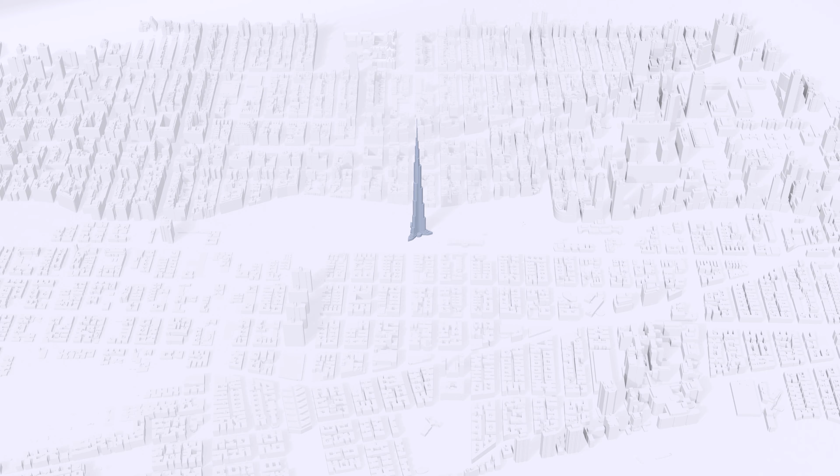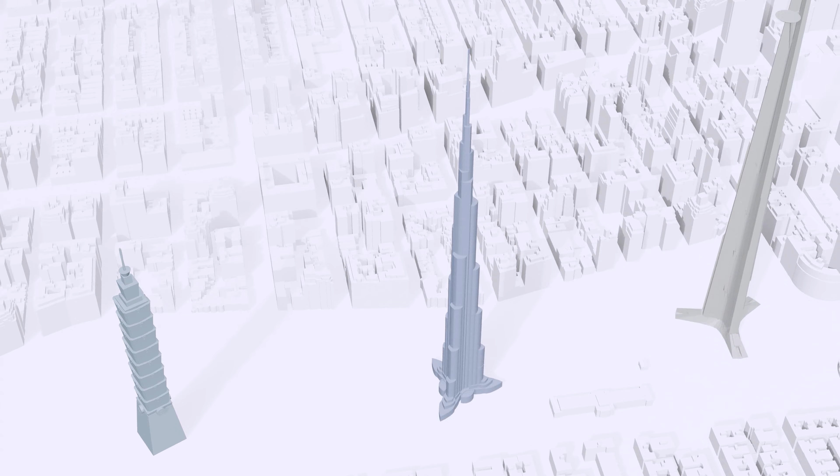This is Burj Khalifa, the current tallest skyscraper in the world, rising to a height of 828 meters, beating the previous holder, Taipei 101, in 2010 by a large margin. Yet the next in line to become the tallest building in the world is the Jeddah Tower, currently under construction and designed to a height of at least 1,000 meters.

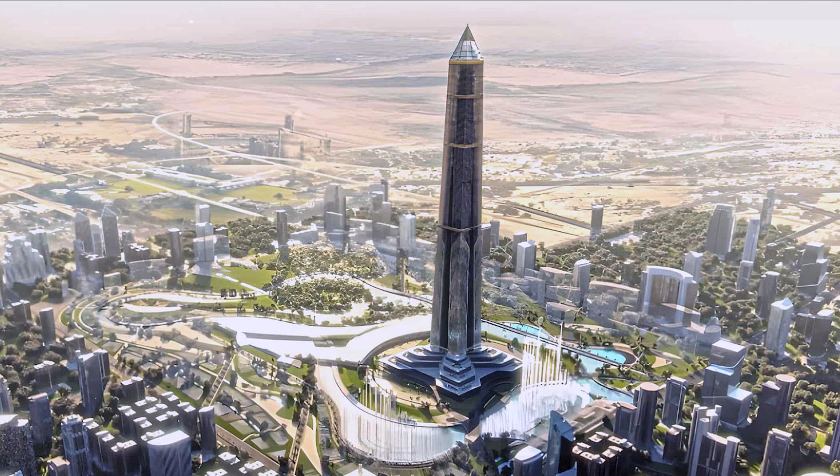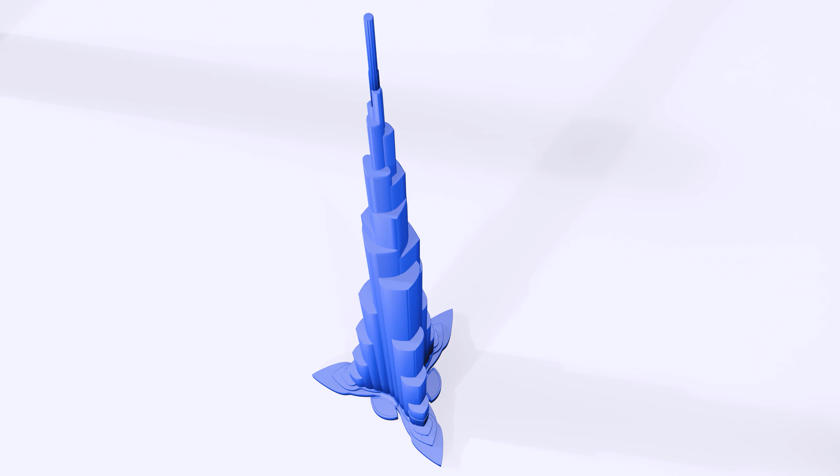While this seems impressive, there have been many proposals for mega tall skyscrapers, rising to 1 mile and some even higher. So how feasible are these mega tall skyscrapers? Engineering, construction and maintenance of mega tall skyscrapers is so complicated that they are often overlooked when discussing this topic. The fact is, higher doesn't always mean better, and in this video we'll explore the engineering and economics behind some famous mega tall skyscrapers to find out how high we can build. Let's dive in.

It is no surprise that the need for cities with tall buildings boiled down to overpopulation and efficiency. As the world population will drastically increase in the future, cities have been growing to keep up with this demand to provide both living and work opportunities. This migration of the rural population to cities is a major cause of this increase. Once people get used to urban living, they rarely go back to the countryside.

Only 30% of the world's population was urban in 1950. Today, 55% of the world's population resides in urban areas, and it is estimated that the urban population will further increase to about 70% by 2050, according to the United Nations Department of Economic and Social Affairs. To prevent urban sprawl and the destruction of valuable agricultural lands and improve transport, cities have been growing vertically rather than laterally.

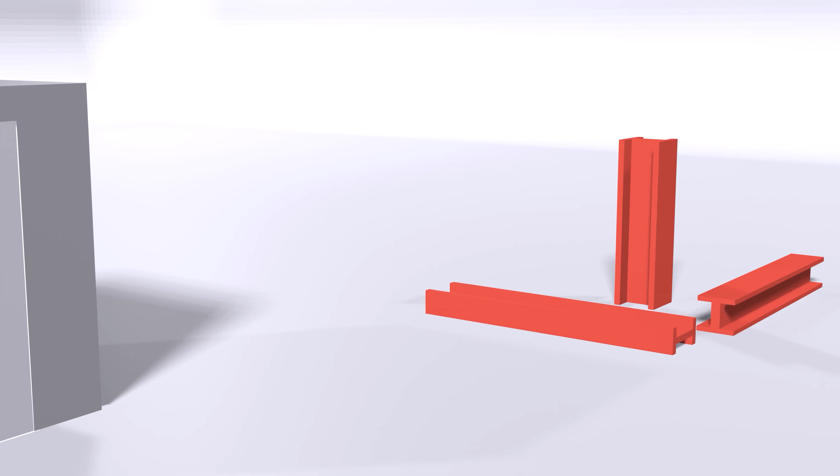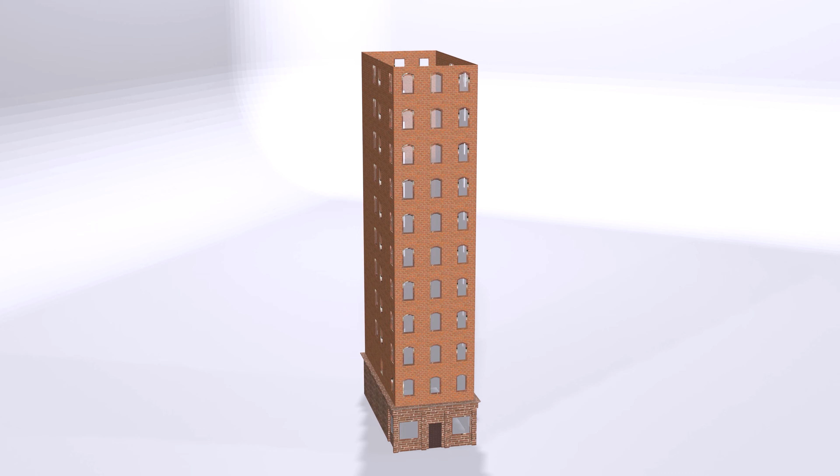The humble beginnings of the first multi-story building were only made practical through the use of elevators and steel. In 1857, the Haughwout Department Store in New York witnessed the installation of the world's first passenger elevator, invented by the American industrialist Elisha Otis, which could travel 5 floors in less than a minute. Yet the earliest skyscrapers rested on extremely thick masonry walls at the ground level, which limited how high we could build before the building collapsed under its own weight. Architects and engineers soon turned to a cast iron and wrought iron framework to support the weight of the building's upper floors, allowing for more floor space.

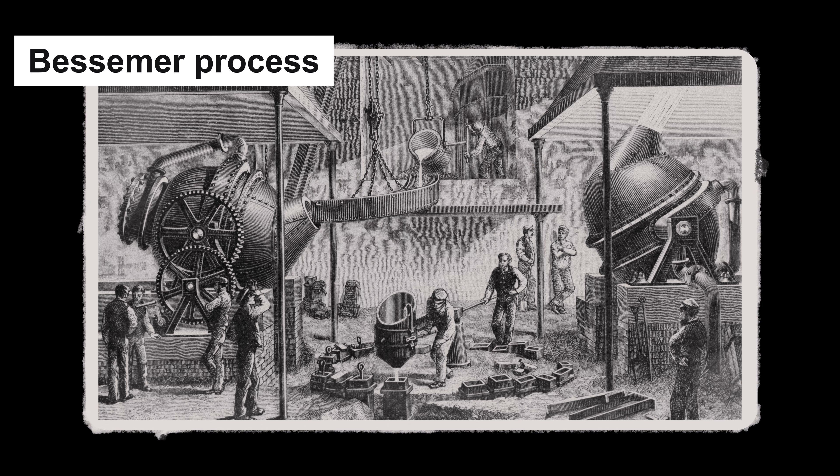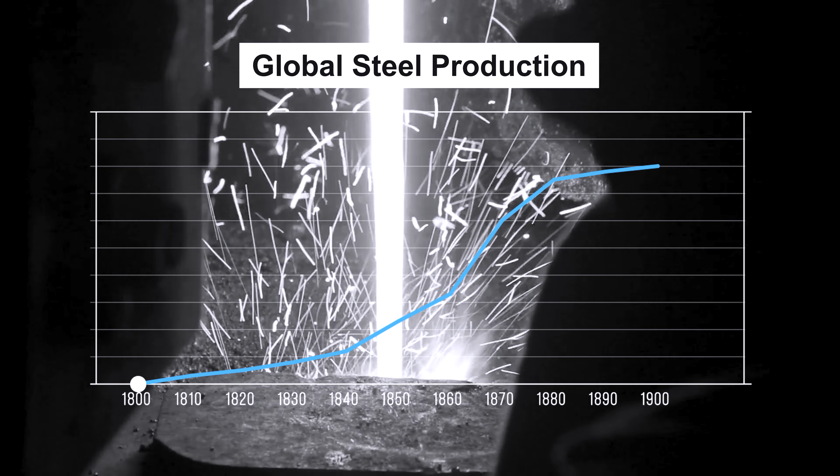It was, however, the refinement of the Bessemer process in 1860 that allowed for a major advance in skyscraper construction. This inexpensive industrial process allowed for the mass production of steel from iron. As steel is stronger and lighter in weight than iron, the use of a steel frame was possible in the construction of truly tall buildings.

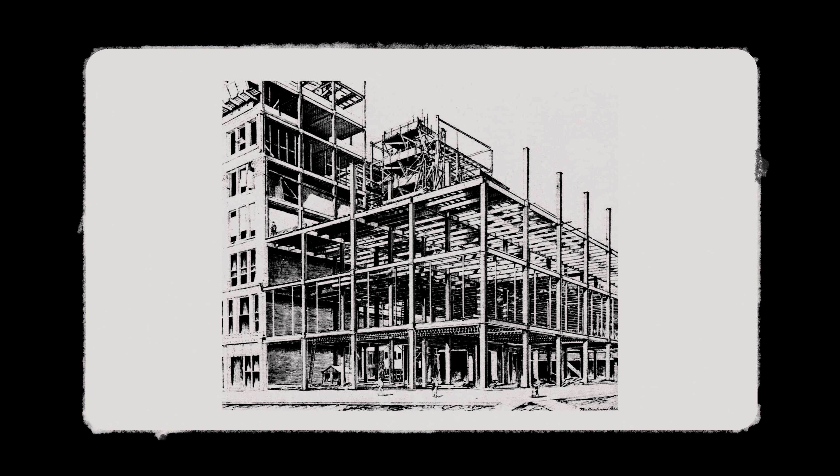The Home Insurance Building, built in 1885 in Chicago, is what most consider the world's first skyscraper. Not only were passenger elevators used, but also an early version of a steel skeletal structure was used for the first time to bear the weight of the building's exterior walls. This innovation was credited to William LeBaron Jenney, who is also widely recognized as the father of the American skyscraper. His work made the modern skyscraper possible. The metal frame design was relatively fire resistant compared to the mostly wooden central city of Chicago.

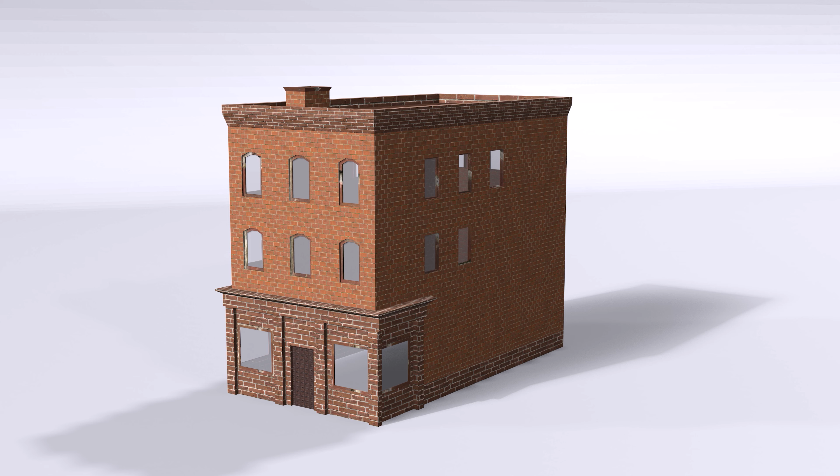The Home Insurance Building didn't have to get thicker, darker and heavier to get taller, unlike its predecessors that were supported by nothing but their own masonry walls. Its steel frame structure weighed only a third as much and proved that high-rise buildings could be a solution for density problems, and with those two essential technologies, a new building type was developed rapidly. And with that, the skyscraper height race began.

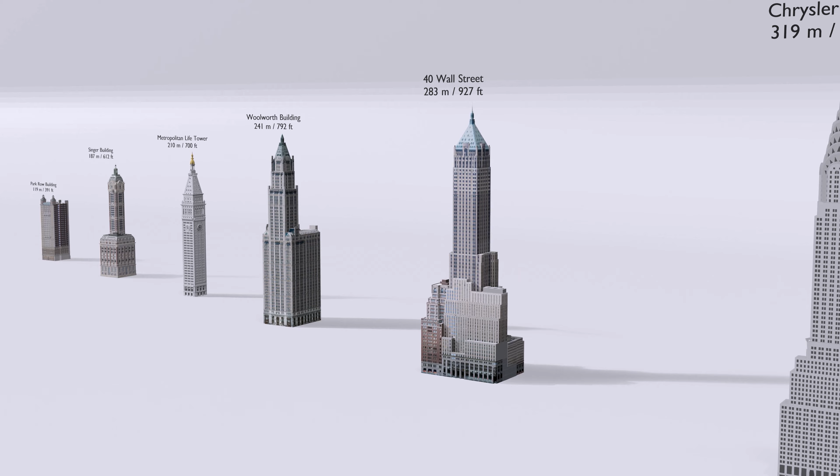Let's do this quickly. Starting from the Park Row Building in New York that reached 30 stories in 1899, using the same steel frame system. Soon after, many skyscrapers were constructed in New York in the following years, getting higher and higher. The threshold height of 300 meters was first reached by the Chrysler Building in 1930. This was overtaken by the 381-meter Empire State Building.

Although this was a record-breaking building, there were virtually no open spaces on all floors of the building. Just have a look at the building's 61st floor. Steel columns and beams formed a stable 3D grid throughout the entire structure. However, such closely spaced columns obstruct open spaces in the building.

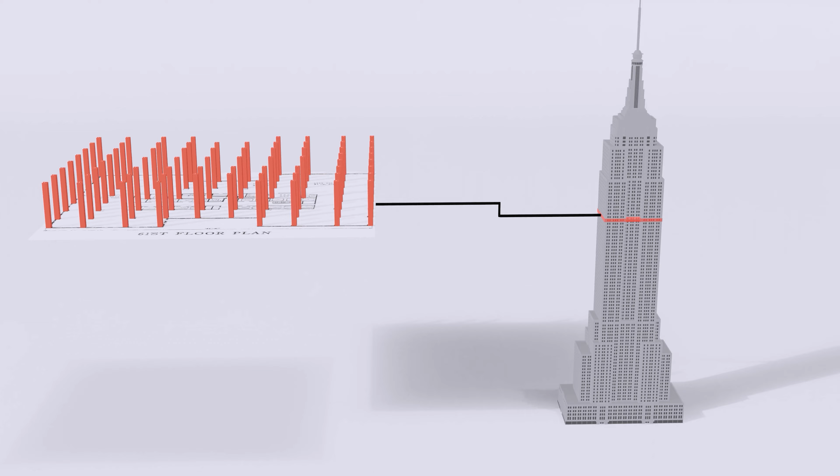The World Trade Center followed the same steel frame structure as the Empire State Building in 1973. The Sears Tower, or the Willis Tower, moves away from the structural frame of its predecessors to a revolutionary bundled tube structural system, which is a cluster of 9 tubes connected together to act as a single unit. The tubes support one another and strengthen the entire structure.

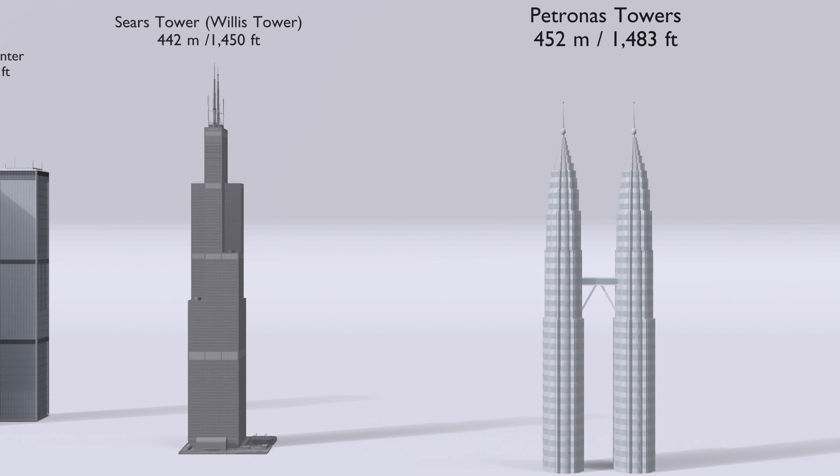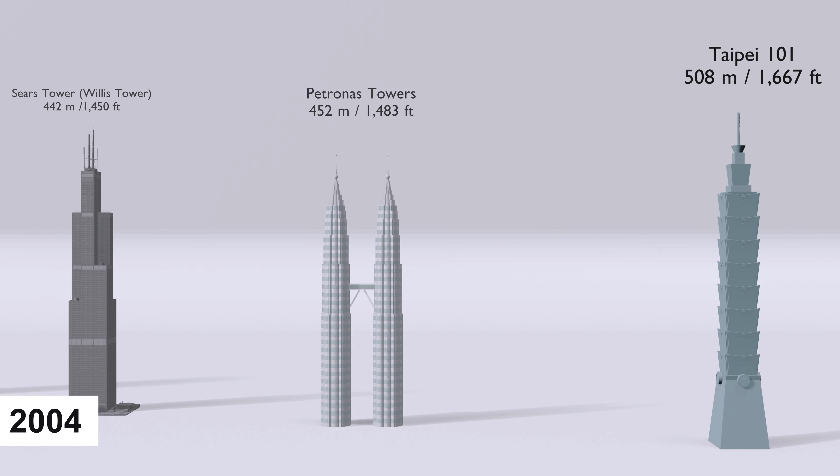Toward the end of the 20th century, the region with the most tall buildings shifted from the US to Asian countries. The title for the tallest in the world was taken by the Petronas Towers in 1998 in Kuala Lumpur. The 452-meter towers exceeded the architectural height of the Willis Tower, which still held the title for the tallest occupied floor building by then. In 2004, the 508-meter Taipei 101 in Taiwan finally eclipsed both architectural and occupied heights of the Willis Tower and used a new structural system known as the core outrigger.

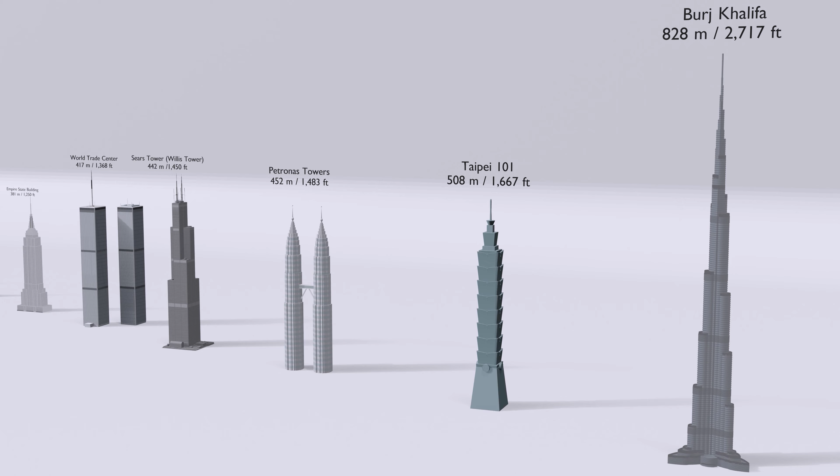On some levels, the inner core is connected with the perimeter columns for more stiffness. And if this starts to become confusing, don't worry, we'll get into this later in this video. In the 21st century, the Middle East also jumped in the skyscraper race with the 828-meter tall Burj Khalifa, which took the title for the tallest building in the world in 2010.

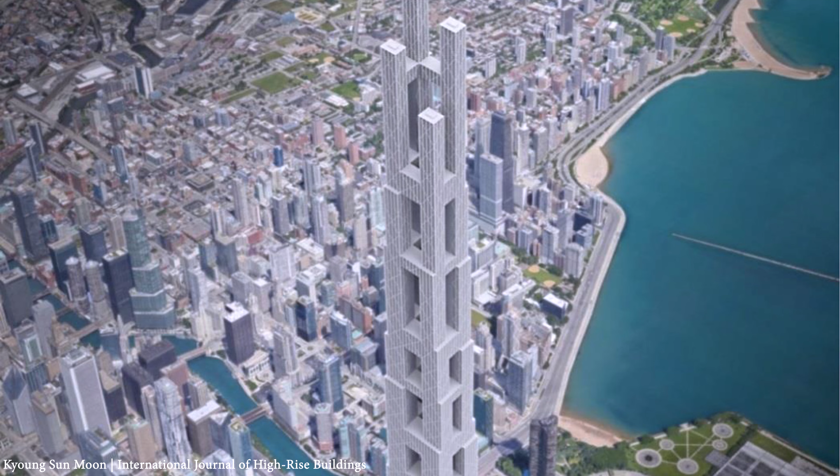However, Burj Khalifa will soon lose its title to the Jeddah Tower, which has been under construction for quite a while now, but that's a discussion for another video. The building is expected to reach a height of over 1 kilometer in Saudi Arabia and will finally surpass the Burj Khalifa. There have also been many proposals for mega tall skyscrapers, with some expected to exceed 1 mile, including this building, which we will get into later in this video, and some reaching even more ridiculous heights like the X-Seed 4000. Although this structure was never meant to be constructed, it's a testament of human ambition.

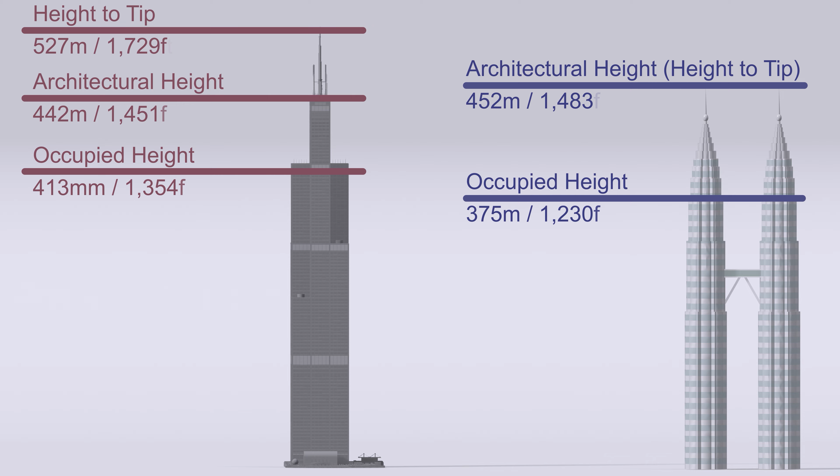When it comes to building mega tall skyscrapers, the question is not whether these proposals are possible or not. In many cases, it's not an engineering issue. The issue is, why would anyone want to build these structures in the first place? One of the most fundamental architectural challenges is to provide occupiable spaces for people, which many current tall skyscrapers fail miserably in delivering. When the Petronas Towers were completed, it was architecturally taller than the Willis Tower by 10 meters, but the Willis Tower's occupied height was 38 meters higher than the Petronas Towers.

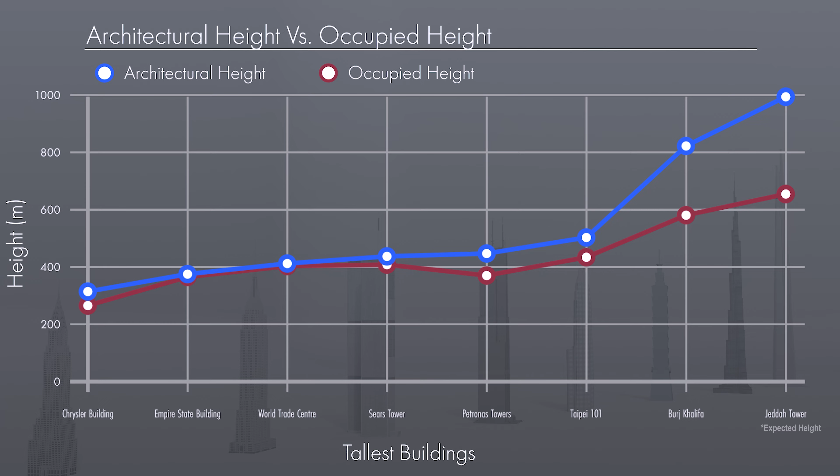The height of the Petronas Towers was accomplished by constructing the spires as an integral part of the main structure. The architectural height does not include functional and technical equipment that can be removed, so things such as antennas and signage are not considered part of the architectural height, which is why the Petronas Towers were architecturally higher. Architectural and occupied height differences become even larger as buildings become taller, as owners wish to extend the height of their buildings with so-called vanity heights by constructing spires.

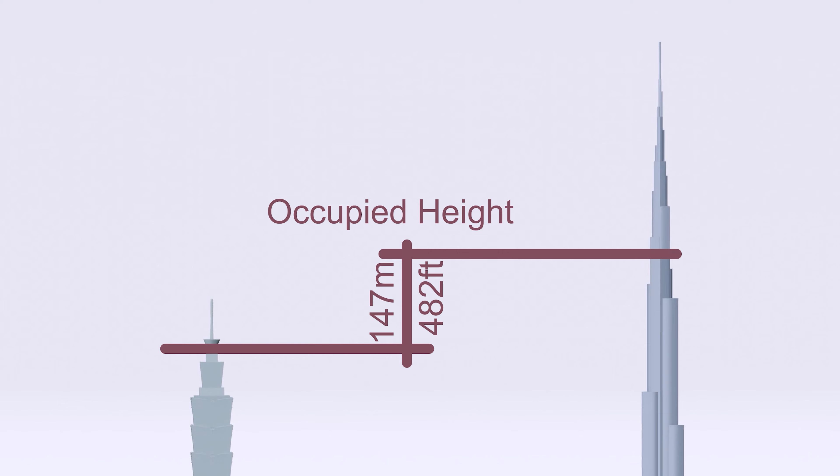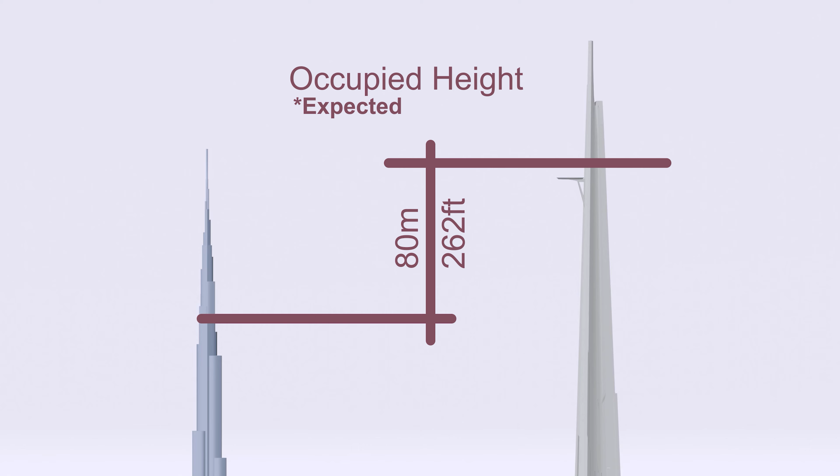The current tallest, Burj Khalifa, with its height of 828 meters, exceeds Taipei 101 by a significant margin of 320 meters. However, the occupied height difference between Burj Khalifa and Taipei 101 is only 147 meters. It is also expected that the occupied height difference is only 80 meters between Burj Khalifa and the Jeddah Tower. Much of this massive skyscraper will be completely deserted. The Burj Khalifa has more than 200 floors, but only 160 of them are accessible to the public. The building's top floors are so thin that no one can live in them.

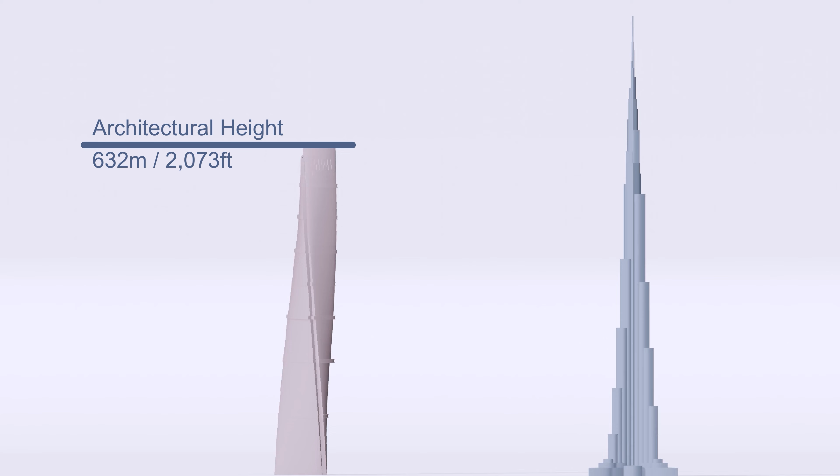An excellent example of maximizing occupiable spaces is the Shanghai Tower, which opened in 2015, and it's a 128-story building with an architectural height of 632 meters. While it is still significantly less than the Burj Khalifa, its occupied height is only 2 meters different. Unfortunately, in this era of architectural design, many recent supertall heights are often more monumental than practical compared to those of the 1970s. Tall buildings are used to show off the country's prestige. Yet for a tall building to be considered a skyscraper, at least 50% of its height must be occupiable, according to the Council on Tall Buildings and Urban Habitat. Therefore, you can't just build a tower that reaches 2 kilometers into the sky and call it the tallest building.

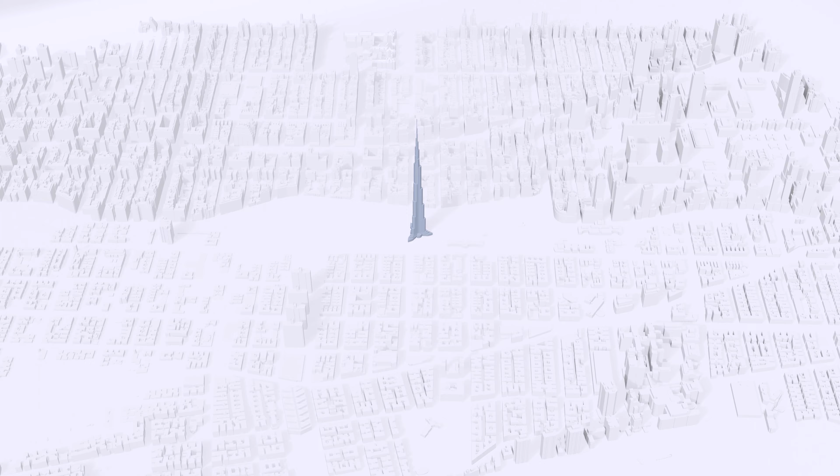Telecommunication and observation towers do not meet the 50% threshold and are not considered skyscrapers. But is there a way we can build more functional tall buildings that reach 1 mile in height and have more usable space than current structures?

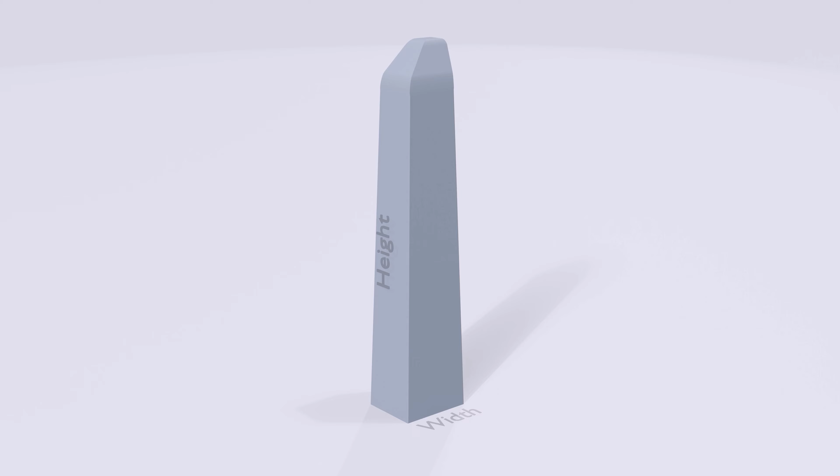The greatest engineering challenge in tall buildings is to contain the forces of gravity and wind. Tall buildings will likely collapse under their own weight unless they taper off to the top. As the building gets taller, the slenderness height-to-width ratio increases, and the tower becomes dramatically more sensitive to wind. As a result, it cannot be comfortably inhabited.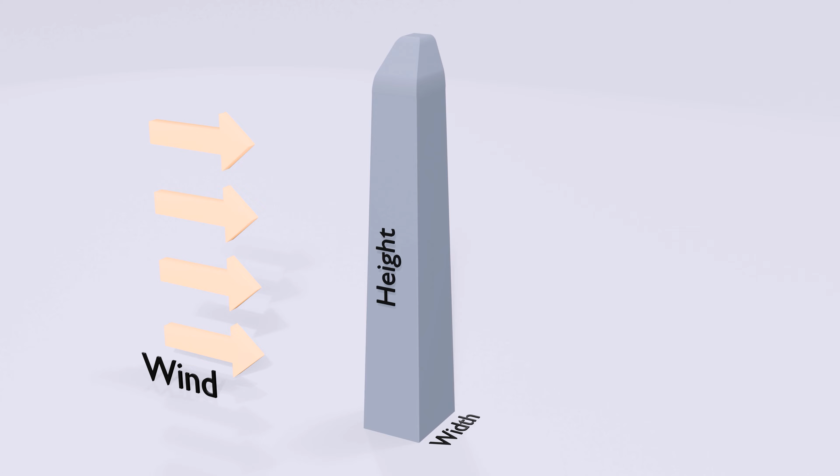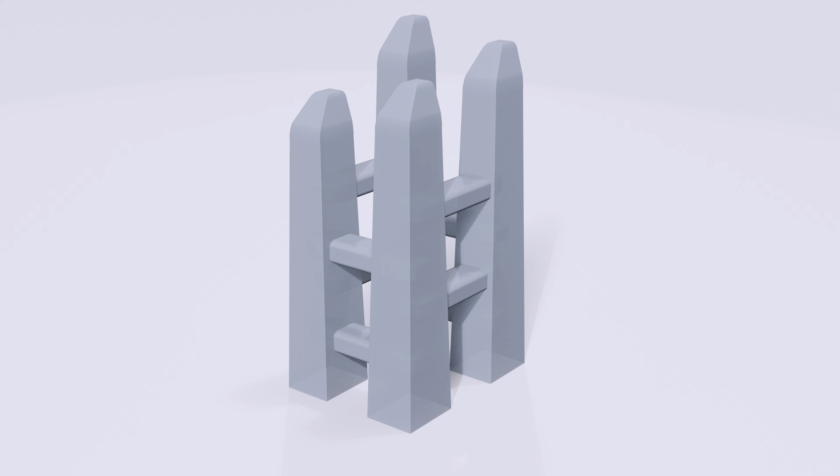It is also worth mentioning that humans are surprisingly sensitive to vibration, to the extent that building motions may feel uncomfortable, even if they are small. To overcome the slenderness effect, we can make the building wider at the base, or connect several towers with bridges at different levels, so they will reinforce and stiffen each other. However, it is not always possible when dealing with dense cities with small blocks of land.

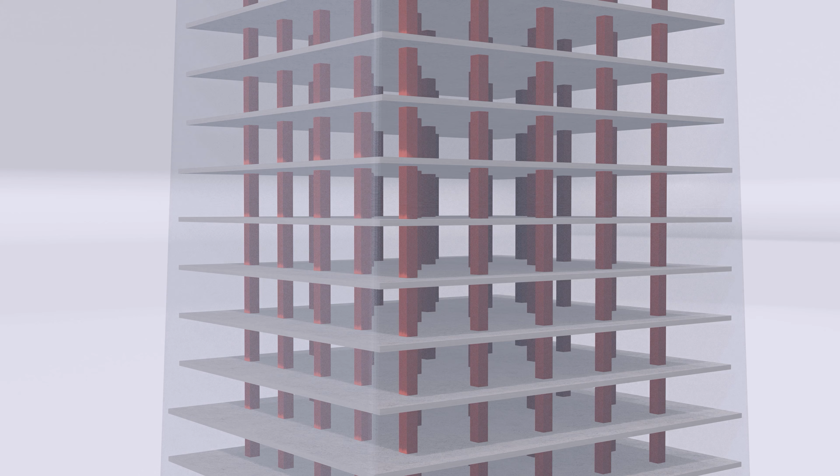Structurally, a skyscraper consists of a substructure or a foundation of different types depending on the ground and soil condition, and a superstructure of columns and girders above the ground. We can simplify this by imagining this tall building as a vertical cantilever out of the ground. As we all know, a steel beam consists of two flanges and a web that is capable of supporting its own weight. It is also able to support lateral forces from the wind.

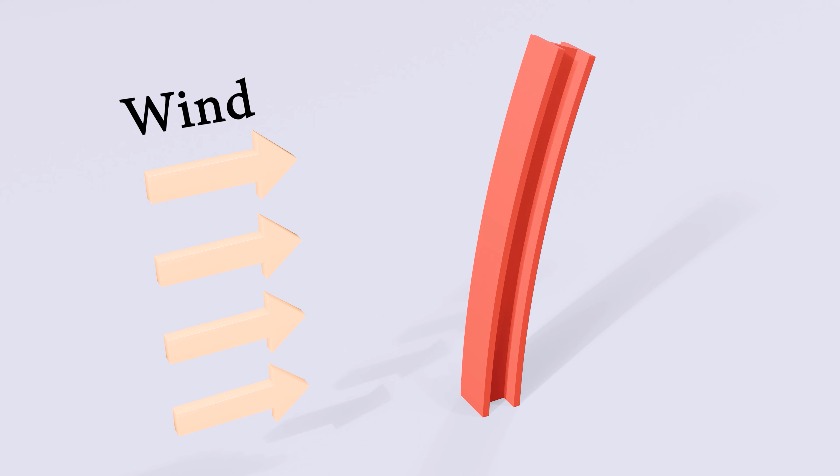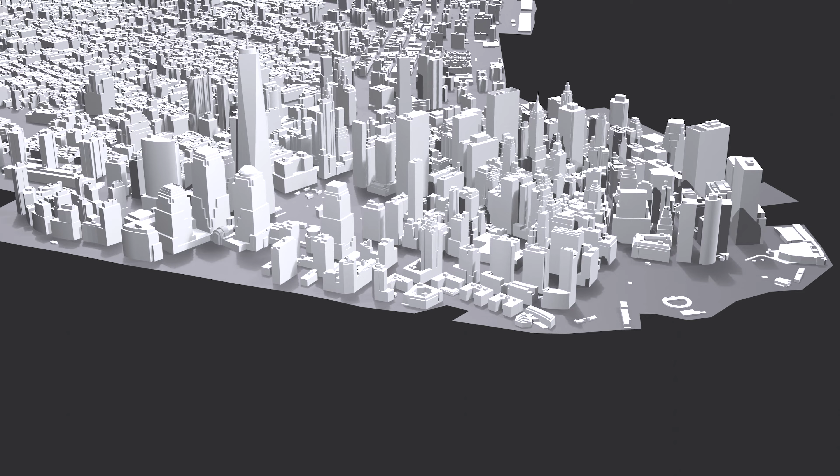Let's see what happens. As the wind blows directly on it, the cantilever can deflect, and the flanges facing the wind experience tension, while the far flanges experience compression. Yet altogether, a system with its foundation and superstructure can contain both vertical and lateral loads. Just like a cantilever, buildings have structural systems to support their own weight and any lateral movement caused by wind and earthquakes, which govern the design of high-rise buildings.

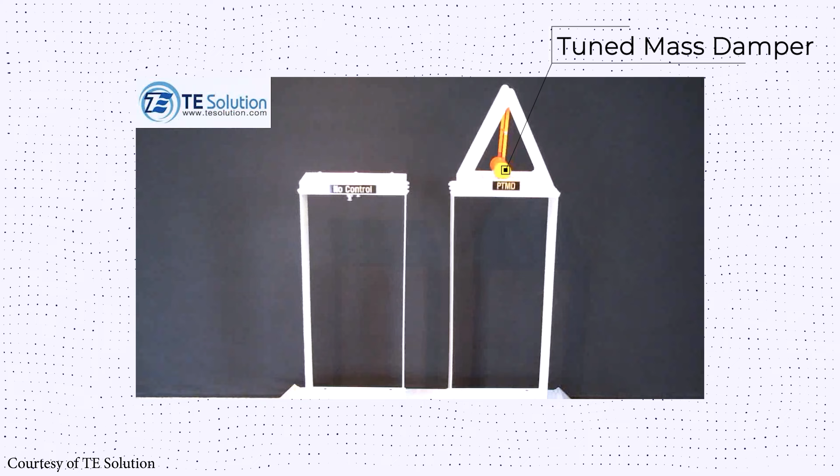Up to 10 stories, the wind loads rarely affect the design. However, for tall buildings, wind and gusting effects become especially problematic. Transverse loading, called vortex shedding, becomes in sync with the building. This effect of wind can be minimized by installing tuned mass damper systems, which reduce the effect of wind forces. We can also aerodynamically shape the building. For example, the Shanghai World Financial Center has an opening that reduces the stresses of wind pressures on the tower. Rounding the building can also reduce the wind stresses on the building.

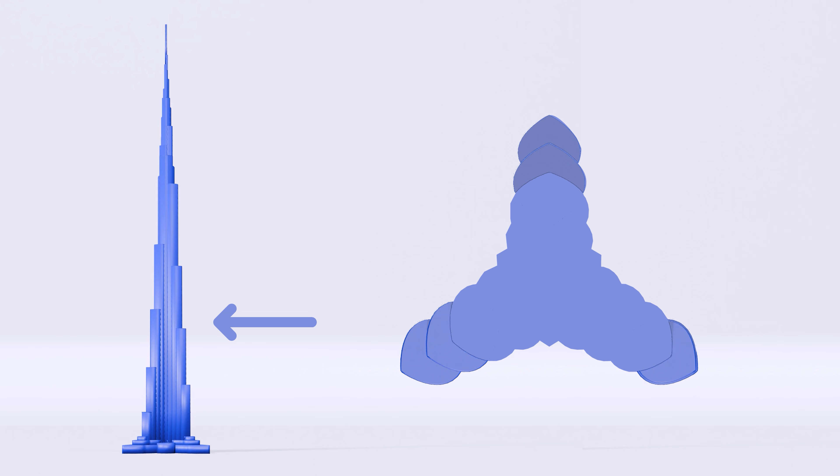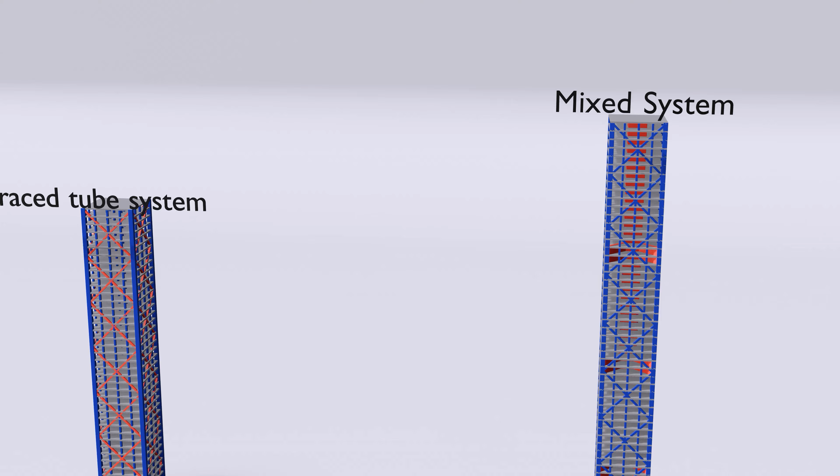The Burj Khalifa's asymmetrical design isn't just for aesthetics, it's a strategic feature to combat vortex shedding. Wind vortices can never coalesce because the wind encounters a different building shape at each tier. This confuses the wind and eliminates potentially dangerous resonance. Therefore, the higher the building, the higher the vertical and lateral loads, and to combat those loads, the building needs more than just a clever external design. It needs an internal structural system that can support itself and withstand lateral loads.

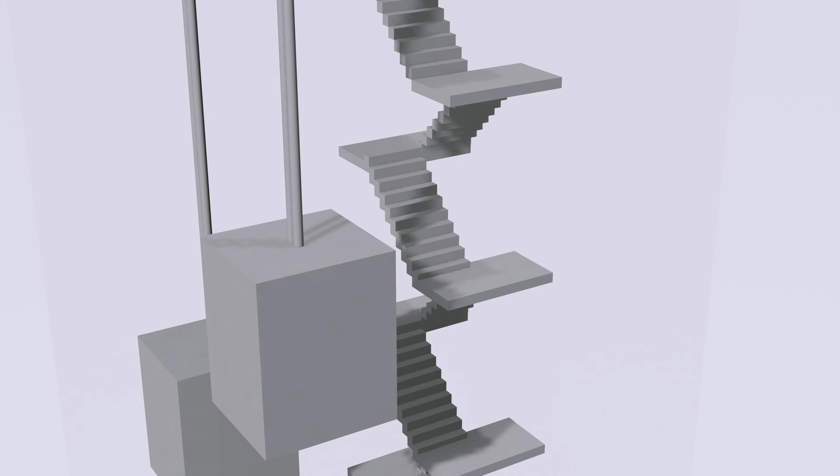There are many structural systems for skyscrapers that are constantly improving with every new building. The tube-in-tube systems are probably the most common for buildings between 40 to 100 stories. The building consists of an inner tube that houses the building services such as elevator shafts and stairs and carries some of the building's vertical loads. The outer tube or the perimeter tube not only carries some of the building's weight, but also resists the building's lateral forces. The tube-in-tube system can be further improved by connecting the inner core with the outer core.

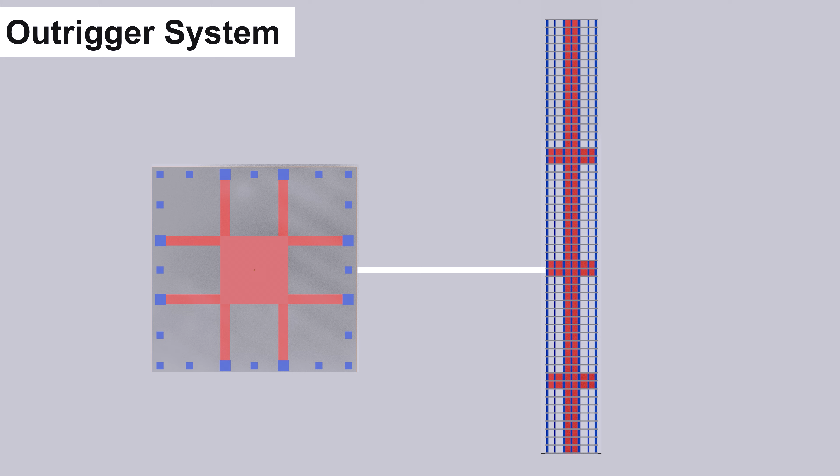This gives the building the required stiffness to counteract the lateral loads of the building by transferring those loads to the core of the building through the outriggers. When the building is loaded laterally, the columns facing the wind experience tension, while the far columns experience compression, which makes them more efficient than structural cores without outriggers. At present, the tallest building structured with a core outrigger system is the 632 meter tall Shanghai Tower.

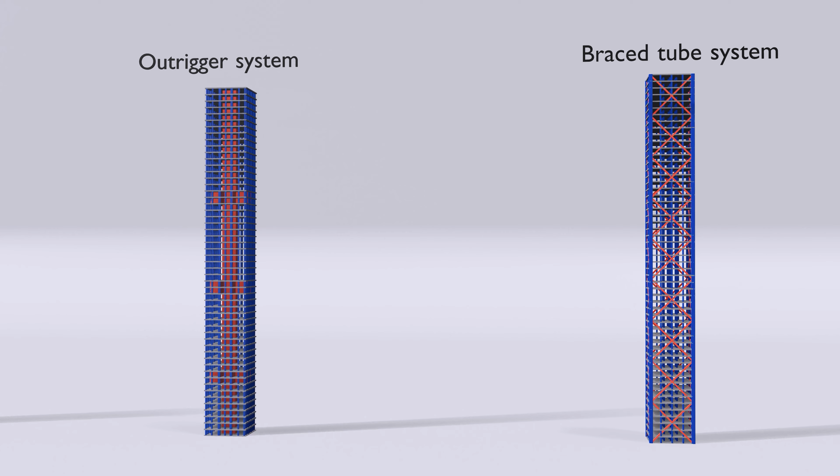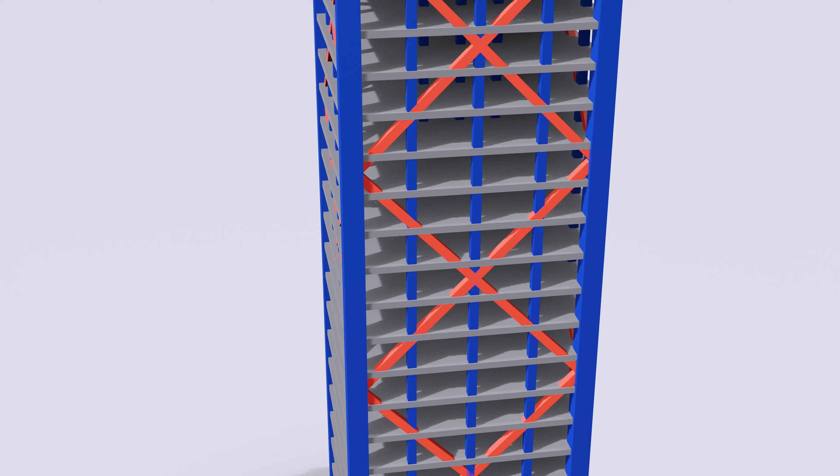However, the efficiency of the core outrigger system cannot exceed some of the most efficient megatube structures, such as the braced megatubes, which use widely spaced exterior columns braced by diagonal members, which transfer gravity loads and lateral loads to the mega columns. An example would be the John Hancock Center. In this 100-story skyscraper in Chicago, you can clearly see the diagonal members which support the megatubes.

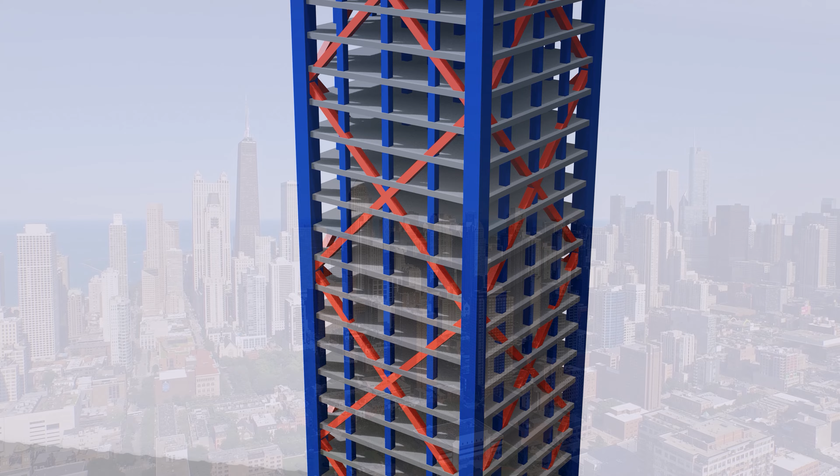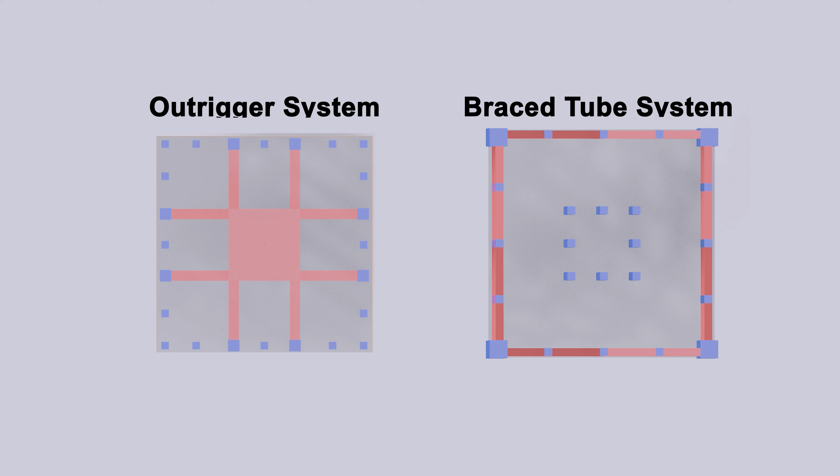This design uses far less steel than the outrigger truss system. Yet the core truss system is used more frequently in tall buildings because it's architecturally more flexible in terms of facade design. All the required lateral stiffness of the braced tubes is allocated at the perimeter tubes, while the core structure is designed to carry only gravity loads.

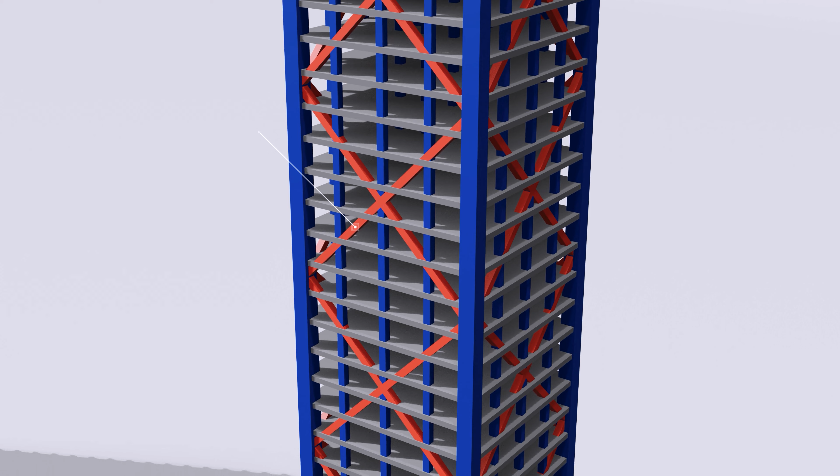This means that the perimeter columns, especially the corner columns, are quite big, which restricts viewing. These are usually prime real estate locations reserved for luxury apartments and office space. The diagonal trusses also restrict viewing, which is why the core truss is the preferable design.

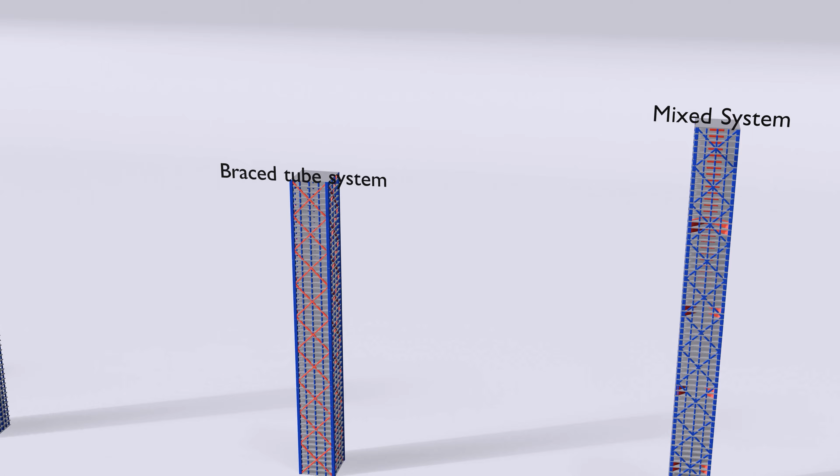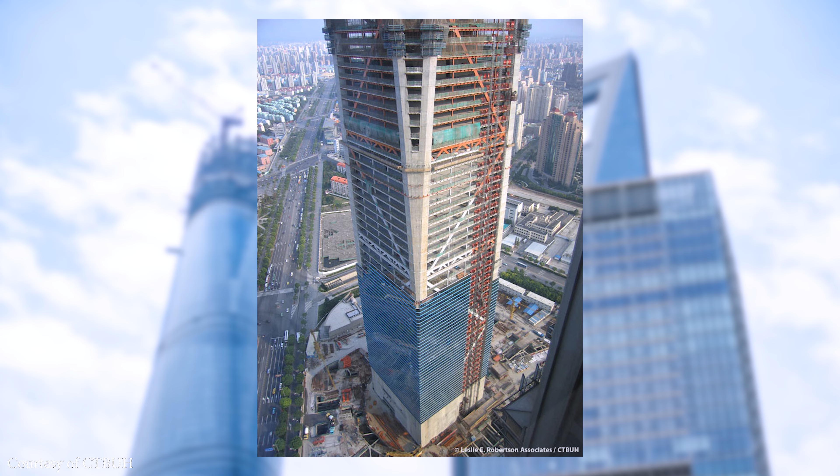Yet sometimes the core truss can be combined with the mega tube system, which results in a mixed system that can reach up to 700 meters. A good example is the Shanghai World Financial Center. During its construction, before all the glass and the building finishes were installed, you can clearly see the mega columns of the building connected to the building outrigger and the diagonal trusses.

While this looks impressive, the tallest building in the world took a different approach for a very good reason. As discussed earlier in this video, for buildings to get taller, they need to get wider. So if we scale a square building to get 1 kilometer high, the interior spaces become uncomfortable for users, especially due to the lack of natural daylight.

Burj Khalifa and the Jeddah Tower move away from the square building design to a buttressed core system. This design not only provides good viewing, but is also structurally much more favorable because it's able to confuse wind with its unsymmetrical design. Burj Khalifa has 3 wings that get smaller as the building gets higher.

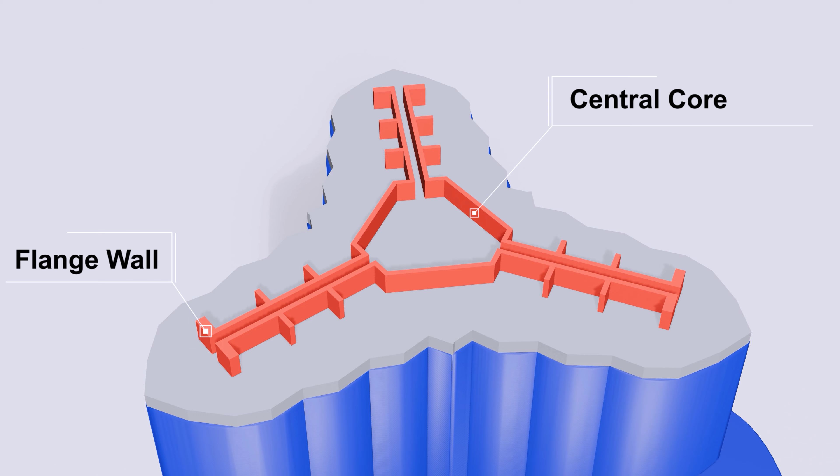The central core itself is further extended as shear walls into the architectural spaces of the 3 wings and terminated with a thickened wall. These thickened end walls are quite similar to the flanges of a vertical cantilever. The difference is it has a Y-shaped cross section where the extended shear walls act as webs. The wings are also stiffened by additional shear walls called fin walls, which also act architecturally as interior walls.

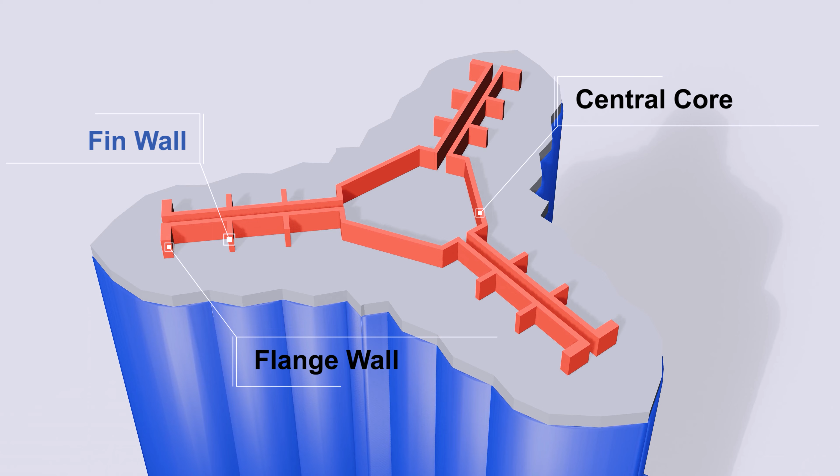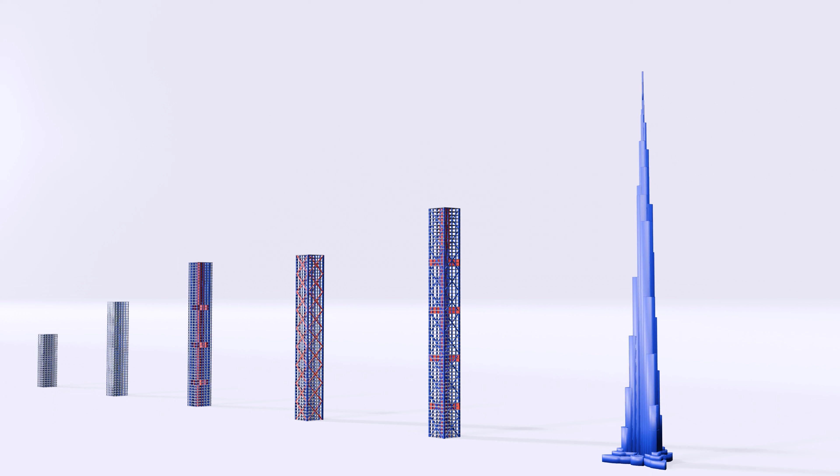The buttressed core system gives Burj Khalifa the stiffness required to counteract any lateral loads, and the building is able to carry its vertical loads by tapering to the top, which means less usable space as the building gets higher, and this provides an architectural limitation. But is it possible to build higher without sacrificing much usable space?

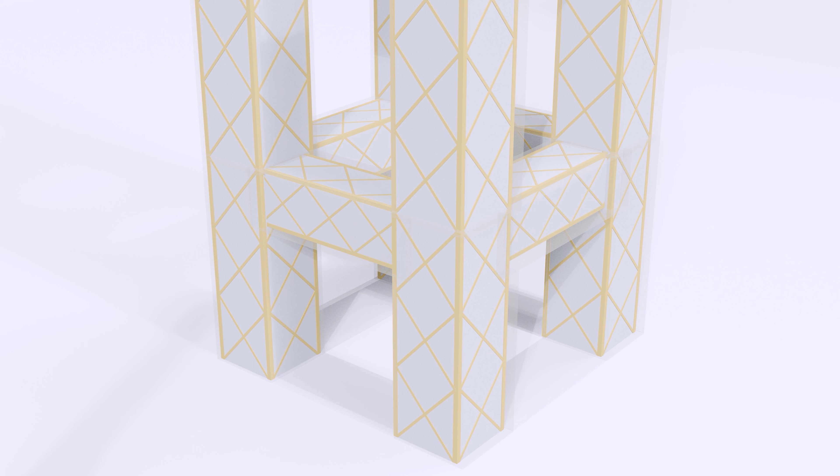The answer is yes. Perhaps one of the most radical proposals for mile-high skyscrapers is the superframe conjoined tower design. Fazlur Rahman Khan, who engineered the John Hancock Center, envisioned a conjoined tower with 4 braced megatubes interconnected by multi-story trusses. The height of these towers can be increased very efficiently by structurally connecting them.

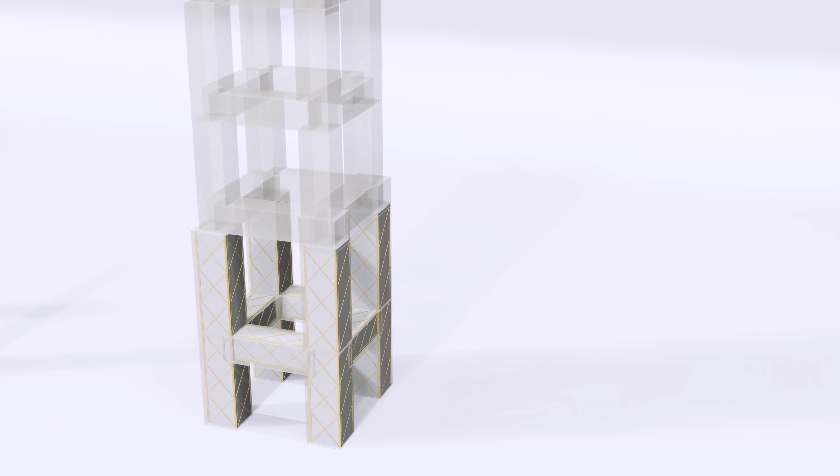The horizontal braced tubes are what create the superframe, which is basically combining these towers into one building, and uses the width of the entire complex as structural depth instead of the width of the individual towers, resulting in a stiff structure with a huge lateral resisting capacity.

This concept can also be applied to 3 buildings in a triangle shape with 120 degrees between them, or even conjoined towers with more than 4 buildings, which is similar to the concept of the Tokyo Sky Mile Tower, or even the X-Seed 4000, which is a group of buildings connected together.

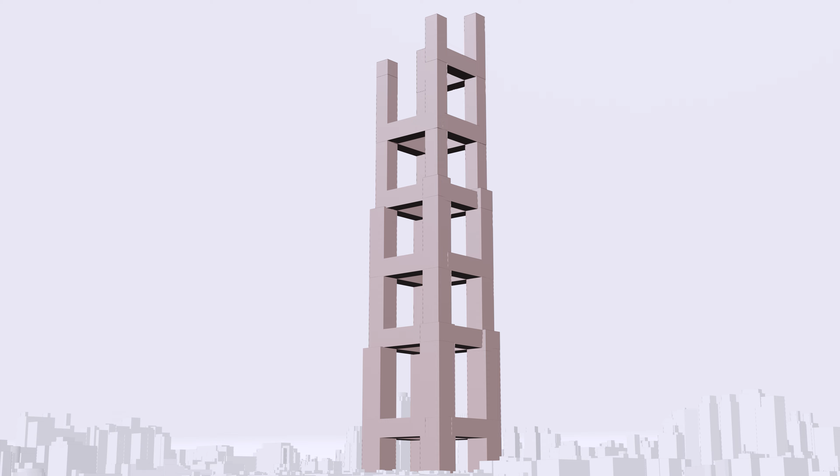Despite its characteristics for extremely tall buildings, the superframe conjoined tower design may not be easily employed for existing dense urban land because of the very large building sites required. The standard block in Manhattan is about 274 by 80 meters, which means in order to build a conjoined tower with 4 buildings, almost 4 blocks of land would need to be used.

Considering the limited land size, it would take decades to acquire the land needed to build such a structure, that is if someone has the guts to take on such a massive risk. Although structurally it might seem possible to build mile-high buildings, which is an excellent way to prevent urban sprawl, realistically, is building super tall economical?

Hong Kong shares many similarities with New York. Both are land-starved and surrounded by water. Both are international trade and commerce hubs, and both have large populations, with skyscrapers crowding those two cities. Yet the Chinese government decided to ban skyscrapers over 500 meters because of safety reasons and waste of resources.

For example, previous projects such as the Shanghai Tower were unable to generate revenue successfully. The project experienced significant cost overruns and delays. The building's total cost was reported to be 2.4 billion, much more than initially planned due to the complexities of its design and construction. The building suffered from many issues such as an oversupply of office space in the city, the rising cost, and the change of work trends that left the building largely unoccupied for many years.

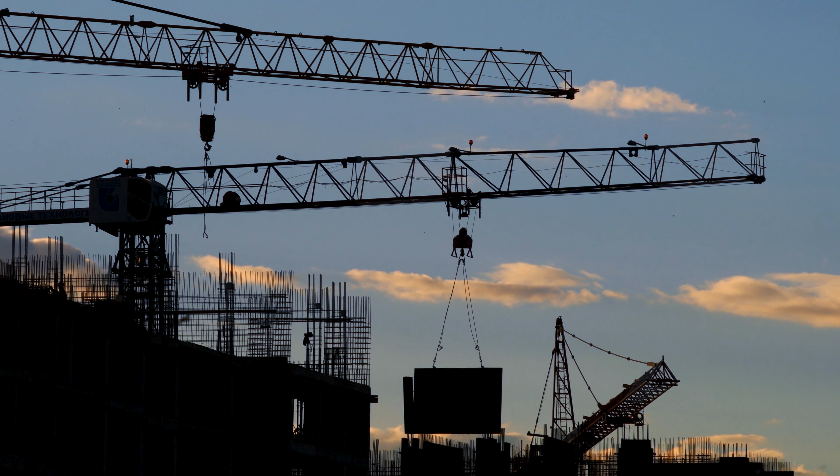Tall buildings obviously cost a staggering amount of money. Burj Khalifa cost 1.5 billion, and the Jeddah Tower reportedly would cost 1.2 billion. However, it would not be surprising if this figure doubles in the years to come, and any government or entity that pays that kind of money needs to recoup the cost somehow, making these builds financially unfeasible. But such projects end up as symbols of the city, which is why some countries justify the construction of such mega projects. In addition to the cost, there are other issues that face tall buildings.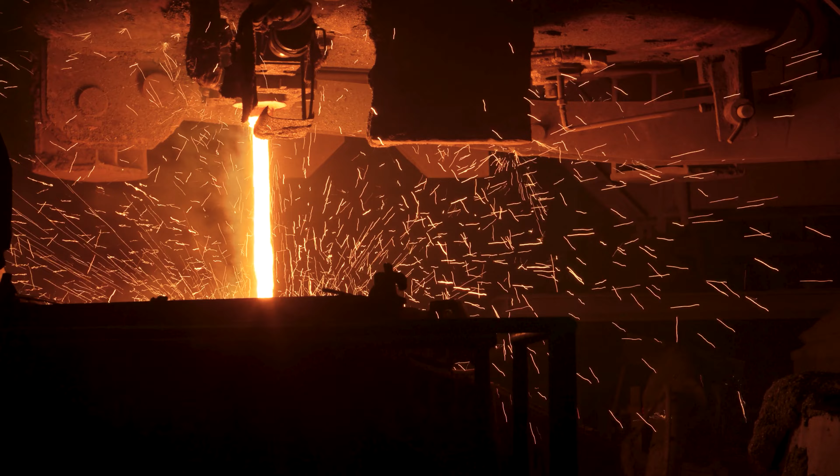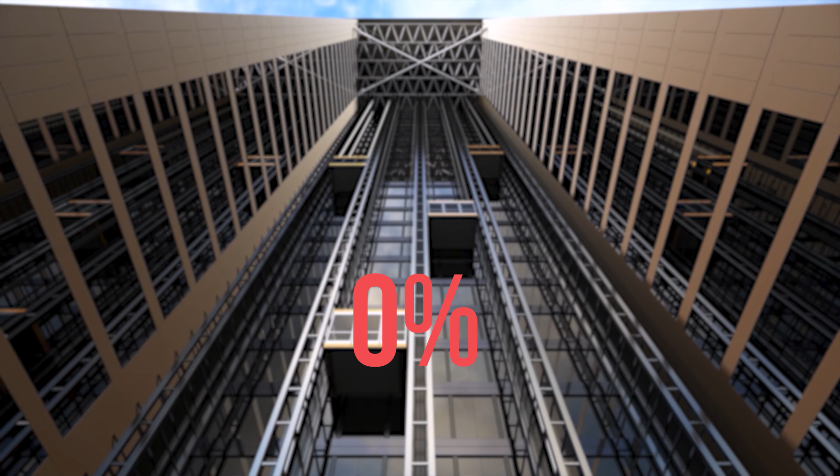The construction of skyscrapers involves intensive use of materials like steel, concrete, and glass, which have high carbon footprints due to the energy-intensive processes involved in their production. Tall buildings require a significant amount of energy for heating, cooling, lighting, and operating elevators. According to UCL's Energy Institute, tall skyscrapers account for 40% of the total energy consumption each year. The main reason is related to heating and cooling. Large windows may provide magnificent views, but they are not good insulators. Even triple glazed windows lose far more heat than a well-insulated brick wall.

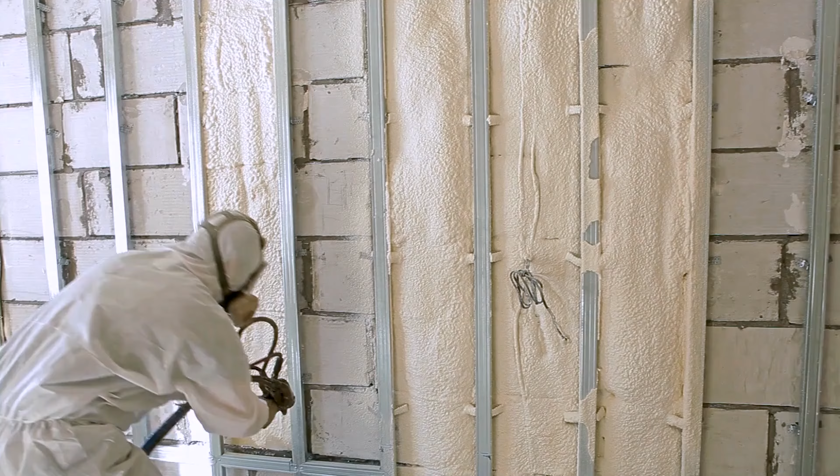Supply of water is another issue. Since water does not flow uphill, high-rise buildings depend on pumps to lift water to the upper floors. Tall buildings can have up to 3 different pump systems for chilled water, heated water, and sprinkler system, which require energy and space to function. And let's not forget waste disposal, which is another complicated system that needs to be fitted for a building to be functional. Yet the two biggest limitations of skyscrapers have always been fire and vertical transport.

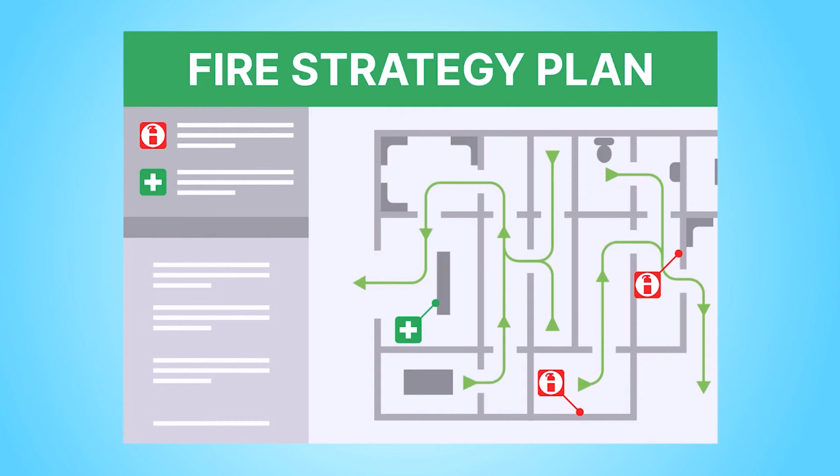It is much more difficult to design fire safety plans for skyscrapers because it takes longer to evacuate during an emergency. Due to the immense height, conventional firefighting techniques are useless. The average fire hose can spray up to 15 meters, which means for a 100-meter tall building this would not work. And in the case of the Burj Khalifa, it's over 800 meters. In such cases, skyscrapers need to be designed so that fire outbreaks can burn themselves out without external intervention and allow people to exit the building safely. This means that skyscrapers need to be constructed using fire-resistant materials so they won't collapse easily. They also need to be separated into compartments to prevent the spreading of fire and equipped with fire suppression systems such as sprinklers to put these fires out.

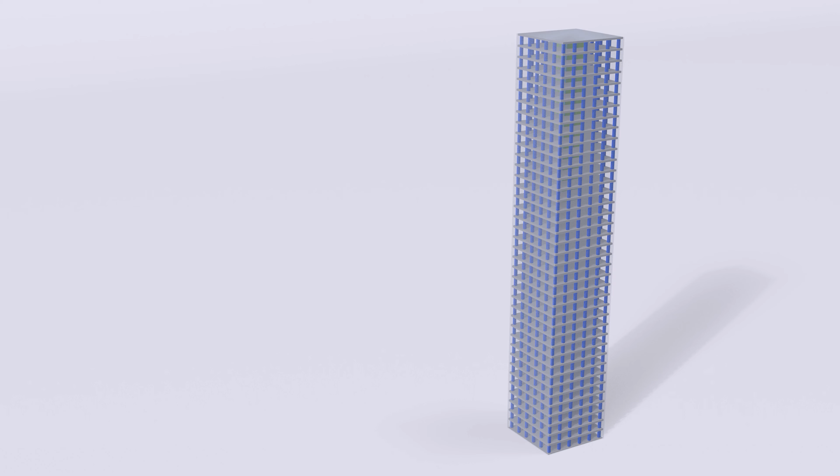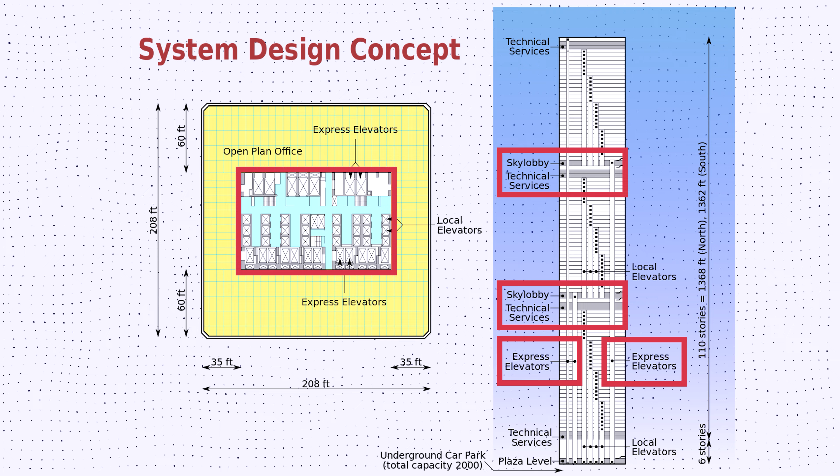On another issue, the taller the skyscraper, the more elevators it requires. A single elevator cannot get to the top of an enormous skyscraper because the weight of the elevator cables becomes too much for the winch motor to haul. Instead, mega-tall skyscrapers rely on transfer elevators and sky lobbies. The more elevators the building has, the less space there is for offices and apartments. Plus, people would have to wait longer for an elevator, which is a very difficult issue to balance when working with limited spaces. This is a huge area of skyscraper design and construction that is usually overlooked when discussing how high we can build.

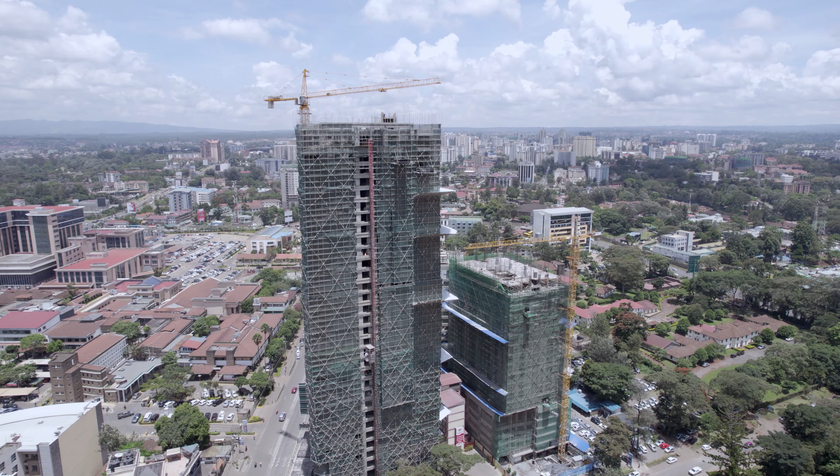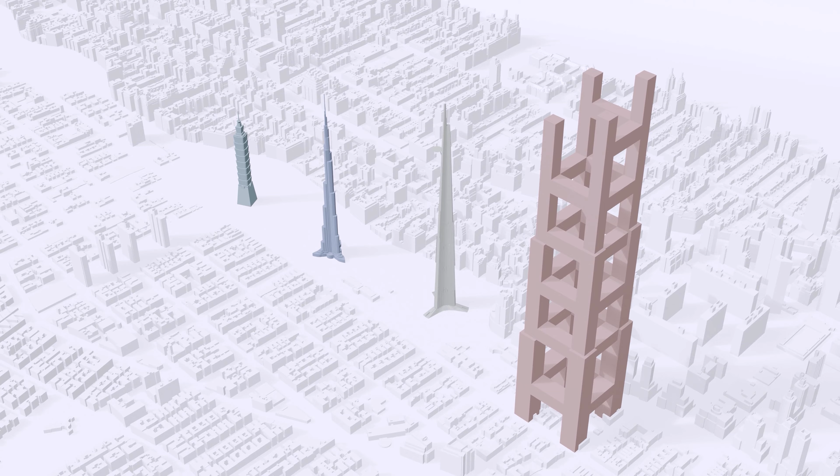Research shows that economic heights for most tall buildings range between 40 to 50 stories, which is between 120 to 175 meters. Within this range, tall buildings are most energy efficient and can be built in a minimum time schedule. Densely built low-rise buildings are more space and carbon efficient compared to high-rise buildings with higher carbon impact. Yet unfortunately, the height of tall buildings is dictated by market-driven real estate, ego-driven prestige, and a sense of competition. So in the end, how tall could a skyscraper be? In theory, there is no real limit as long as the base can expand to accommodate the building height and deep pockets to make such a building a reality.